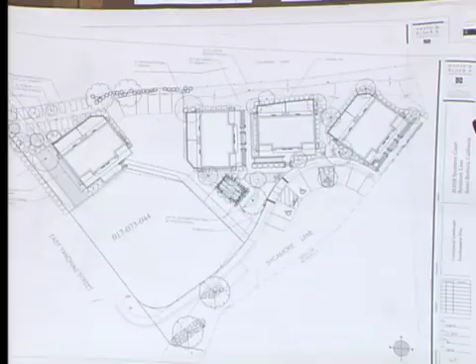Do you have any lighting cut sheets yet? No, not yet. We do have a color board.

There are 2 more comments I haven't mentioned yet. The board finds that proposed zoning modifications are aesthetically appropriate and do not pose consistency issues with the ABR design guidelines or the neighborhood preservation ordinance. The board also finds the proposed zoning modifications present no negative impacts to the neighborhood.

I noticed you pulled those pilasters back - did that change your distance between buildings issues at all, or is it still there? It's gotten better, but we still have multiple modifications. They've been interpreted slightly differently after our intake meeting, so we're pursuing 3 modifications: one for a front yard condition, since this building is actually a front yard because of the street here; the second covers several different between-buildings conditions; and on the far side of the site, there are conditions where you're just talking a few inches into the setback, just where the building was built - that's a side yard condition. So we have front yard, side yard, and in-between building modifications.

And then the final was to choose one style of architecture, either Monterey colonial or Spanish colonial revival. That's been the biggest challenge for us, since this is a renovation and we're dealing with existing building structures, and for the most part our additions are additive - we're not looking to rip them completely apart and disrupt. We're trying to minimize the period of disruption on occupancy, keep the tenants in there as long as possible, have the improvements take as little time as possible, and keep the budget within reason.

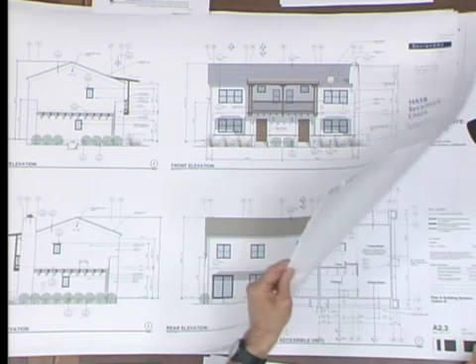Okay, questions from the board? Oh, we open it for public comment? And seeing none, we'll start with questions from the board.

Stephanie: Kevin, is there a reason why these louver doors for the water heater closets can't be moved to the inside face underneath the covered area, the overhang? Kevin: Oh, we were just keeping them in the existing locations. So in 9 of the 10 spots, they'd be exactly the same frame locations, and then in the handicap accessible unit, they'd be raised but still on the same face.

Okay, so it's because they're in the same locations and nothing about that area is changing, is that correct? Like some of these are added, some areas taken away. Those are the same boxes. There might be room to put them on the sides if we had to. It's a little tighter, I think, proportionally. It seemed about the same proportion in my opinion, but take a look at it.

Also, would you consider this small eyebrow detail in other areas, such as the second floor windows, or is that cost prohibitive? No, we didn't do it on the back side because the cornice is so close to the window head. I understand, here it is, but not on this side. Actually, you're right, on this side, this detail—I understand you don't have enough there, but we could add it to possibly the back side to give a little dimension to the windows on that second floor.

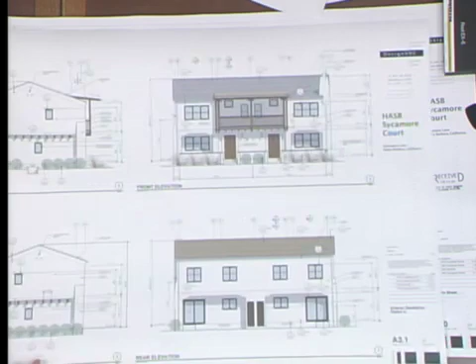Okay, other comments? Amy: I agree with Stephanie, and I think the change from plaster to wood details goes a lot nicer with the design, and also with the wood on the front doors and the recesses there.

The only material I was looking at was the color for the doors and windows, and thinking about it being more of a bronze anodized rather than black, a little bit warmer. Well, verbally I think you represented that it was going to be bronze. I did—that's a decision that goes back to like 5 years ago, we just kept that one the same. So is it black or bronze anodized? It should be bronze, that looks black. I asked her to put on bronze. So that was my only comment, we prefer the bronze anodized color. Yeah, I'll check on that. Other comments? That was all I had. Okay, thank you, Amy.

Courtney: I don't have any comments.

Howard: I agree with comments made, and I would especially like to see these louvered doors to the hot water heater enclosures moved around to the side. It would greatly simplify that elevation in all of the buildings. Other than that, I think the changes made to the fenestration and details to calm this project down and simplify it are well done. I think this project is ready. All right.

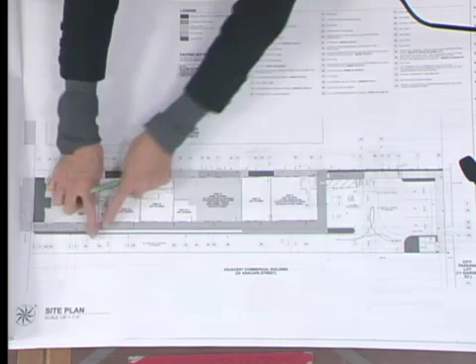The justification for us decreasing this planter by 1 foot from the previously approved 2 feet was because we're developing and adding a huge amount of green to the project that goes all the way down the driveway in the form of that new arbor that we're going to talk about next.

But since they're under construction with this deck, that 1-foot extension is part of the review after final. That's why it's clouded.

The ramp that was here and here has now been relocated along the north property line. Instead of that ramp being here and here, we just moved the parking over, and this planter strip got decreased just slightly in size to accommodate the ramp that now is going there on that north property line.

So this plan is going to show us the ramp over here, but this plan is showing it over here. Is that what you're telling me? No, I'm telling you that the previous approval that you guys saw had a deck that was approved that was 1 foot less than this ramp.

What I asked you though was I'm trying to get a distinction between the two things we're looking at totally different things, different scopes of work. We're only talking about the deck and the ramp now, for this set, the review after final. So those are the only things that we're asking to move forward with.

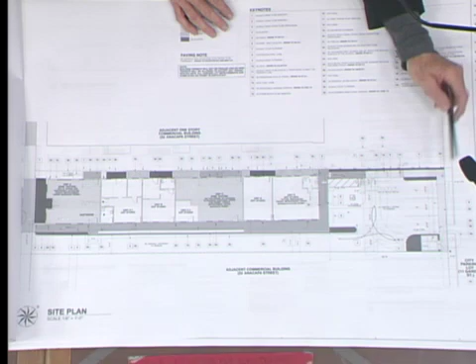That's why we separated them out, because that allows us to complete the parking lot. When we complete the parking lot, then we're allowed to open the gate. So until we complete the parking lot, we can't open the gate to the public parking lot. And since we have the construction crew already working on this, that's why we want to do that.

So let's look at that, and that makes sense to staff too. No comment. So that's all we're doing there. It doesn't really translate into drawings because, like I said, it's just 1 foot. Everything else is remaining the same as it was.

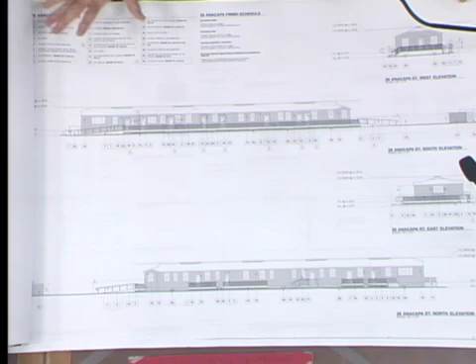The hog fencing was already approved and was already currently under construction. You could read over the minutes from the last meeting one by one, and we can address all those. But I just want to tell you now that the only thing that we're requesting to be separated are those couple of things. Then I'll get into the comments about the arbor.

Did we comment on what you're asking for approval on with this set? No, we didn't. There were no specific comments, so there's no point in reading them out. I just separated them out, and that's why I'm telling you. It doesn't change anything. It doesn't change the planting.

See this planter, there's still the same amount of bird of paradise still here. It just, the planter went from like that big to that big. That's that project. All right.

I think we need to vote on them one at a time, right? This is the review after final, right? Yeah. But just to make sure, if you want to, Kirk, you can read the minutes to make sure that I'm not missing something. But I don't think there were any specific comments to those 3 items on the minutes.

No, there isn't. About the railing, are you addressing the railings when you move the deck? The railings were always proposed as hog fencing, and they still are. Right, but there was a comment about the lack of uniformity in the railings. That was with the presentation we heard last time, which we're going to look at next. Okay, so that's not a part of this project.

This is the final review. Right, okay, that's fine.

I didn't quite understand that comment because we got the hog fence railing approved in the previous proposal, and the front railing on Anacapa was existing to remain. It's not a hog fence railing, it's an existing wood picket railing. We've already gotten approval for that, and we're not making any changes to the railings.

We saw wrought iron railings in the last drawing that Henry presented. It might have been artistic license on his sketch. Okay, so that's not part of this, and we're not making any changes to the railings that were previously approved.

Let me ask about one of the representations that was made - that we were going to have vines growing up on this big long trellis. Is that going to happen? Okay, so questions from the board on the landscaping being presented here? I have one. Yes, Stephanie?

Why does the driveway planter need to get smaller by a foot? It needs to get smaller to accommodate the increase in the deck by a foot. This deck, because it's also an ADA path of travel, will allow for a little shelf, enough for people to sit with a glass of wine since these are wine tasting areas, giving more room for a nice outdoor seating area.

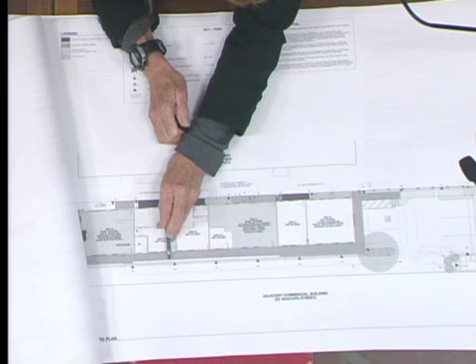So I thought you said the width on this driveway changed - let's go back to the original. No, actually it didn't. So the planter width used to be wider out here, but it didn't change - this line never moved. The deck line moved out so the planting is a little bit less in there. That's all.

Other questions? Scott? Just one - I want to reiterate, you guys are doing the arbor project, right? Yes.

One question, because I didn't see this before - what was the ramp configuration beforehand? Before there was a small area here, a landing, and then a larger area ramping up this way. So you ramped up this way, and now you're proposing just to put it along the driveway?

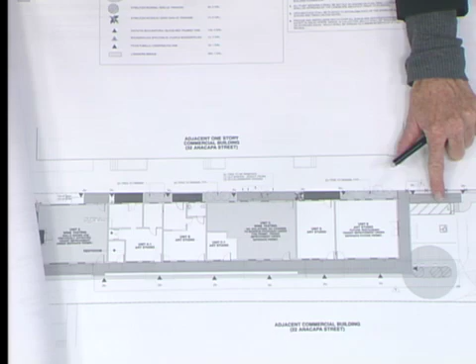Was there planting lost out here because of that? No, what was there before - this handicap parking spot was shoved over, and the loading zone overlapped with the path of travel. So this loading zone and everything shifted over, and that's why this moved. Okay, so you just shifted everything over.

Questions? That was Courtney - sorry if I'm beating a dead horse, but has the walkway configuration changed since we saw it last time, not with Henry, but with you? No, the only thing that changed is that because there's room for the ramp now, to get to the ramp you go from the loading zone - just that little jog or swoop that was added. Nothing else has changed.

And that material is concrete, that walkway? Is it a different color than the parking lot, or is it gray? I think it's just concrete right now, I can't remember exactly what we got approved - it might have been colored concrete previously approved. We're making no changes to the previous approval. Okay, then I won't ask any more about that.

The final width of this skinny planter between the deck and the driveway - you said it's a foot, but is that from face of curb to the edge of the deck, or a foot to the back of curb? It was 2 feet. A foot to what - the back of curb or the face of curb? Let me see if there's a detail, I'll show you.

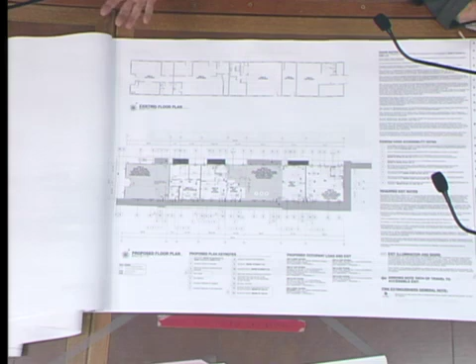If you look at the site plan, and there's the shop. I don't have the previous approval with me. All I know is we moved it out a foot. So if we moved it out a foot and we had 2 feet, we have 1.

I understand your question about the curb, but then the hog fencing doesn't come all the way down - there's a gap between that and the finished grade. No, the fencing comes all the way down, it comes down below the deck as well. Yeah, but there's a 2-inch gap between the bottom of the hog fence and finished grade, which would allow you to kind of shove the plants in underneath. Yeah, we did that on purpose.

The landscape architect wanted that. Who is your landscape architect? Kate Dole.

So just so I understand, the dimension between the building face and the edge of that seat is what, 4 feet? But what's your pinch point there on the deck? I don't see a dimension, and I don't have a scale. I don't see that dimension either. Do you have a scale? No.

No, architectural scale, please. And you can look at the previous approval too, if you want to pull those plans out. So I don't know if that's the right one or not. It's 8 to an inch.

So right now, the deck is 6 feet to the inside of the hog fence top cap, and before it was 5. But the dimension from the bench, the edge of the bench to the face of the wall is what? That was the question - the white space is there. 5 feet. It's 5 feet.

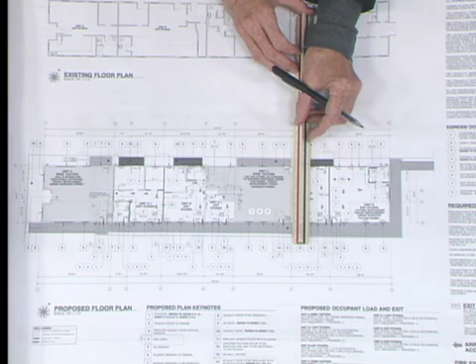Okay, it's not a bench, it's a shelf, and the shelf is 12 inches deep. The shelf is intended to be a seat, right? No, it's just - if you look at the detail, it's intended to be a shelf to put your drink on. Got it, okay.

And in order to get enough room to be able to pass by, we had to move the deck out a foot in order to make it more lively, so people could actually sit there.

I have one more question - so you're saying this distance right here is 5 feet? Finish up this way then. Howard, do you have any questions? No. Okay, Stephanie? Don, is that curb necessary?

So this is showing the planter - 10 feet to the face of curb, and 11 feet to the edge of deck. So you're actually going to have 6 inches of planting. Well, the curb is 4 inches. Okay, so you have 8 inches of planting. It's not intended to be a huge planter, that's why we're adding the arbor.

Right, but you would get even more available planting space if the curb was not there. And it's only cleaner in this one area. I can look at removal of that. It's just cleaner, you know.

I do think the curb will help prevent people from driving into it, it helps protect. Okay, that's what we thought too - from those wheels going right into the side of your fence or building. So I think it's fine, because it's a narrow driveway anyway. Okay, comments?

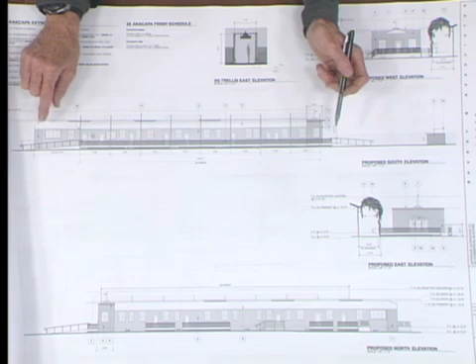So like I said before, when Howard was asking about the railings, it was a misunderstanding about any wrought iron. It was all the hog fencing, not changing, and the front was always a picket fence that is not changing.

The window and door details are all on here. And what was the other comment? Railing design, stormwater management, that was it. Railing design, that was coastal exemption requirements, and I think they got somehow put on here.

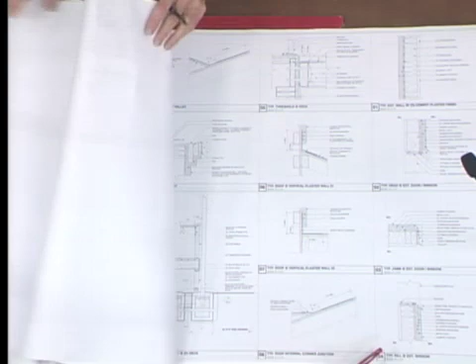Is this a new detail? This is the detail for the steel trellis, the arbor. It's not attached to the railing. It's a flagpole design that goes into the planter right next to the hog fence railing, separate.

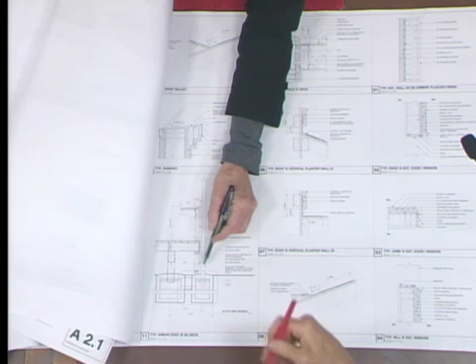And curb is not shown. The curb is something like that, right? Here, well, it's one foot from here, the outside edge of the curb, right? Here, but the flagpole is going right in between there, in that little planter area. And I think there should be notes about stormwater management.

Are there other details that show how that arbor radius works? We don't have them yet from the structural engineer because this is comments only. That's why we wanted to separate the projects as well, because we don't have any more additional structural details of the trellis. It's just that one detail.

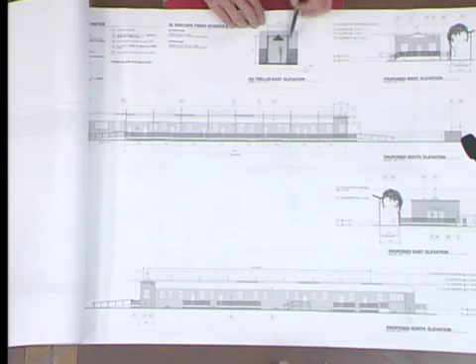This probably got explained by Henry when he was here, but these are existing antique wood ionic columns, and then there's going to be a sign that's under separate permit. We're doing a sign program. But this location of this unit will replace the approved trellis from the other project. Because it wasn't a change to the design, we kept it in this new permit, because it's actually a different trellis. Where does that occur? On the back.

Is that to the parking lot?

To the parking lot here, this replaces this one. What he should have done—I don't think we reviewed that. That's the first time we've seen that. Oh, it was on the other plans though. Maybe it didn't get reviewed. But it's going to be right here instead.

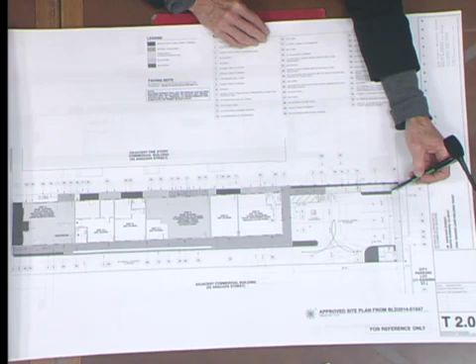The old trellis that got approved had 6 posts as you entered. But as you come down this ramp, you have to turn a corner and go down—this is the handicap access to 36 Anacapa. We brought the whole thing back, and I'm sorry it doesn't reflect here. The new trellis is going to be here, here, here, and here. It's going to be wood columns with an exposed, rustic steel beam across.

And the wrought iron cutout sign, under the sign permit, will be hanging from it. But we brought it back away from the bottom of the ramp so this area isn't crowded, because we had a meeting with the city and they requested that this area be a little more open. So we pulled that back.

So that's—okay, this looks like it's 4 feet 8. I see, okay, that landing is 5 feet. And the height doesn't pose an issue in that location? No, okay, all right.

All right, so questions, comments, public comment? Anyone from the hearers? No? So we're into questions from the board. Howard, are you ready with a question or two?

Yeah, just questioning about these fences here, railings. So I'm looking at the proposed north elevation, and I see the hog fence in several places. And then I see the horizontal rails here in the middle of the building. Which sheet, Howard? Why don't you come over here and point. A2.1, okay, the proposed north elevation. In the middle of the building there's a stair rail and deck rail that's different than the others—is that existing?

It's existing. There's a fence right next to it, and you can't see it from anywhere—there's the fence. If you look at the site plan, it must be the one we didn't have to demolish, but because we're putting a fence along the whole north property line, we didn't feel like anybody was going to see it anyway. Okay, other questions?

And this other railing over here with the crosshatched lath—is that the AC? So you're saying these fences are all up against the property line and another wall, essentially? A 6-foot-high wood fence is going to go along the north property line. That must be your wood existing fence or theirs? I think that's the AC unit, the existing enclosure. So is that your wood fence that you're proposing? Okay, so that's not on the plan, right?

It is on the plan, I don't know what number it is. Looks like 5, it's a new hog fence. Oh, maybe that's the railing. No, it's a new fence—it's a wood fence, and it was already approved on the previous approval. The way it's shown here, it's just a dog-eared fence. It was on the previous approval. So right now, because we separated them, I think what I need to do is go back and take out the ends of anything that already got approval. It's existing, it's already built.

In fact, this line—I want to comment on this fence and these trees. You just reminded me of something I didn't bring up. But in answer to your question, yeah, there's a previously approved fence that got permitted along the entire north property line. Other questions? I think what his point is about is uniforming the materials. Two questions—you're done? I'm done, okay.

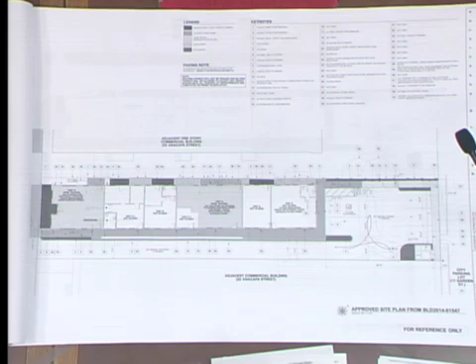I asked because I'm curious where that styling comes from. It didn't come from the existing building - the whole concept is a little funky to go with the funk zone, so they just wanted to use them because they were really cool. I asked him for photos of them, and he didn't give them to me yet. I'll see if I can find photos of them.

The other question I had was related to the height of the trellis across the driveway - is this a specific height requirement, I would assume, for fire or something? Well, when we get the structure from the engineer - but this is what looks good from an arch standpoint, instead of it being a shallow arch. It just wants to be an arch like this, more of a traditional arch, we felt. But it's not drawn based on any specific height requirement.

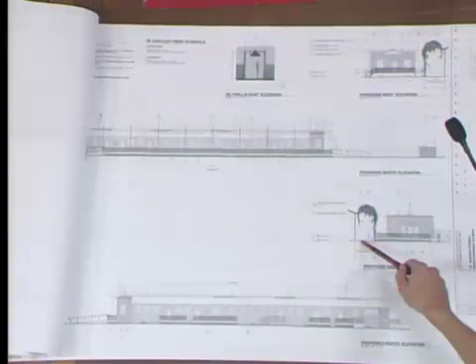It wasn't designed that way for clearance. We don't have to - we're definitely going to meet our required clearances through there, and we meet or exceed them. I don't know what it is as drawn. We don't have this lantern designed yet, so I can't tell you exactly how we determined how to draw it other than it looks good that way. If I had to speak for Henry, who's not here, I would say it looked good that way. And it's drawn now at 9.5 feet up.

Okay, that's all I have.

Just so I'm clear, right now this building is wood on the front, right? So for the previous project, did you get it permitted to do the plaster? No, that's part of this project. Because right now it's all this kind of funky wood, almost like a siding - almost like a hardy board. So under the previous permit, you hadn't already gotten the plaster included? No, that's part of this permit. Okay, that was my one question.

Scott, no questions? Okay, Stephanie?

Raymond sent pictures, and I'm not sure - is this for conceptual or is this for preliminary design approval? We cannot give project design approval, we can just make comments. That's all we can do today.

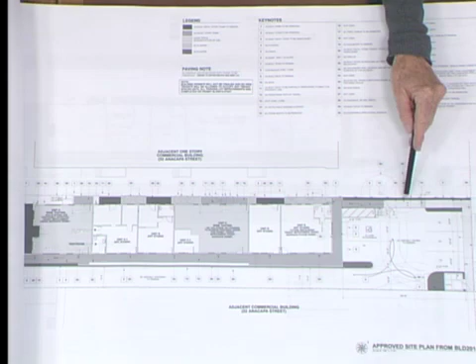The one comment I wanted to make is that these trees on our site plan showed up on the adjacent parcel, but we got a survey of the north property line, and the property line disrupts the trunk of the trees. We want to keep the trees, and the property line runs right through them. It's a little more on the adjacent 32 Anacapa project, but they aren't depicted that way here after the survey came in. Because of the maturity of the trees and what it does to the rear parking lot, we don't want to remove them. I'm saying this now because I think the next project you'll see is a proposal for this property, and I don't know what they're proposing, but I want you to know these trees have been surveyed and the property line does run through and disrupt the trunk of those trees.

Okay, thank you. So all in favor of the motion? Mr. Chair, can I just read through those real quick to make sure I have everything?

Okay, so ABR in general was in favor of the proposed architectural revisions, but needs to see more detail to make a full judgment. Some were concerned with plaster as a building material. You'd need a detail on how the facade meets the metal. Plans need a depiction of all features, such as fencing. Concerned with the height of the trellis and lantern regarding clearance and appearance. Study refining the details for trellis posts and footings, and you need a detail of the curb planter transition to the hog fence. Is that correct?

Yeah, and then continued 2 weeks to the full board. Is that correct? Yep. I would just add... Okay, sounds like we have a couple of other additional comments.

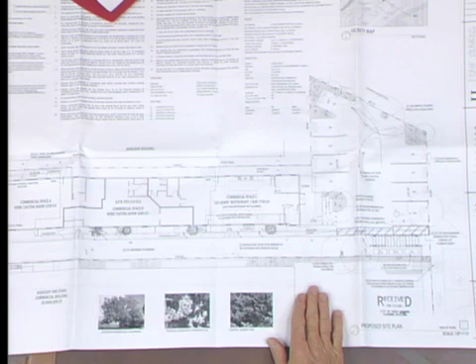Sorry to interrupt, could we break out the photos also? Oh sure, that's a good idea. So currently this is Corks and Crowns, Drake's Winery, and this one's vacant, which we're proposing to do a sit-down restaurant.

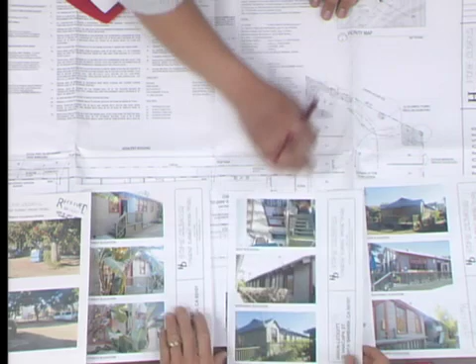So this is the front facade, and which we're not doing anything to. This is the north facade, where we're adding 2 decks. We're extending the deck to provide ADA access from Anacapa Street. And this is the far end from the rear. This is the view from the rear parking lot. Okay, side, and then this is the whole...

These are images of the building from the driveway. Just walking down here, you can see there's some banana trees, elderberries, all along here that are pretty mature. Those are pretty big.

And you're keeping those, but you're proposing a deck around them? Correct. And then finally, this is the driveway, or the parking lot, where we're proposing to restripe and clear coat.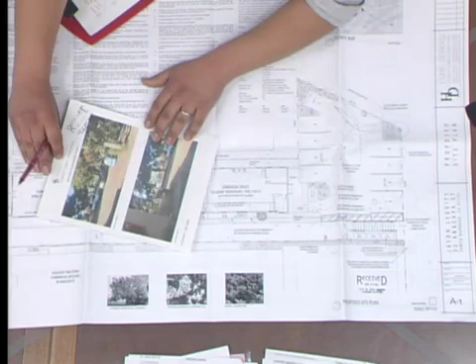And this tree is currently impeding traffic to be able to turn around, which is this one right here. Is that asphalt driveway? Yes. So we're proposing to remove it.

In order to make up for that, we're proposing a new jacaranda right in this new planter, where there will be bicycle parking as well. And some of the banana trees that were going to be in the way, we're proposing to put adjacent, next to that tree, in that same planter.

So then as you were starting off to address our comments from last time, do you want to go on with that? Sure, well there's another aspect to this project. As you saw in the previous presentation, there's an opening, a connection from the city parking lot into this 20 Anacapa property, and they're also proposing to extend the opening in that fence so that there's also access into our property as well.

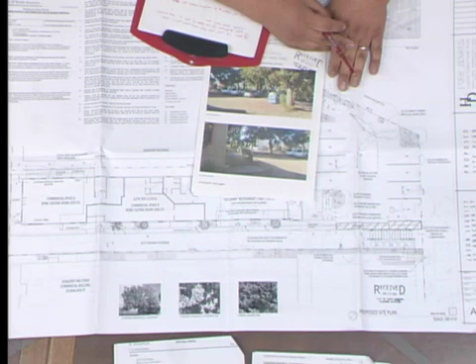And what we've done is we moved the trash enclosure to the back here and pulled it back so that people can get through. And we're proposing a new trellis structure that goes over this access way.

So it creates the same feel of an entrance through the rear, and we're also providing an accessible railing here. In my previous presentation, we had it up against the building. Now we're moving it over here. So that would be right where the trash is currently. We're just creating an enclosure around it.

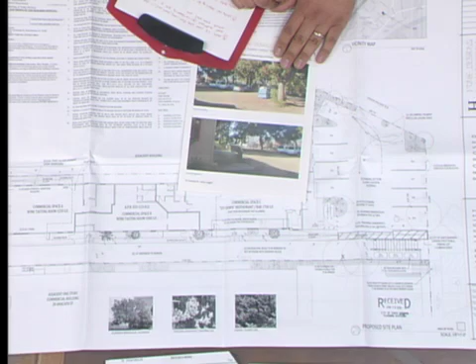So that was actually another one of the comments. It said to study the trellis structure on top of the trash enclosure. So instead of having just a trellis over the walls, I'm proposing this trellis structure in front of the trash enclosure, which you'll see. Provide an elevation of it.

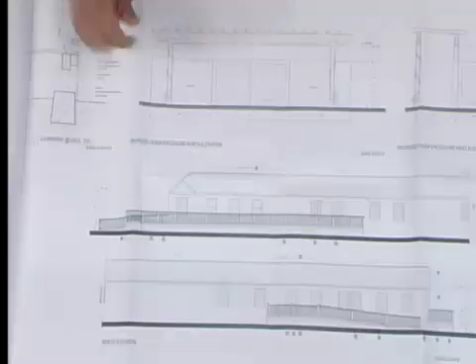Another one of the comments was to study the rail detailing for variation and to match the existing skirt detail. So we've looked at the railing detail and matched it so that the wood goes all the way down, the skirt goes all the way down. And we've provided variation on the driveway side. All this won't be seen since it's on the north side and there's a chain link fence that just divides the two properties. So the railing that will be visible to the public is the one adjacent to the driveway.

So this is the new railing that we're proposing, where we have corrugated metal panels flanking the entrances to each of the tenant spaces. And we have here, here, and here. Was that proposed last time? No, before it was just all wood rail all the way across.

The red flowering gum tree, I missed that, how you were addressing that issue. We're proposing a jacaranda to make up for it over here. Oh, okay.

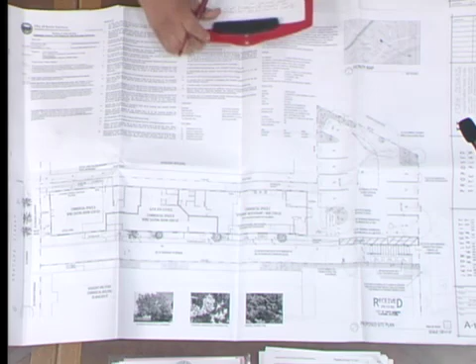So does that conclude your presentation? We had a landscape architect come out, and this is what he recommended, as well as installing drip system irrigation for all the new plantings so that they can take growth.

All right, so we're into public comment. Seeing no one from the public who wishes to comment on this project, we're into questions from the board.

Stephanie? Comment, questions? No questions. Scott?

Can you go over the detail or how you think you might construct that corrugated metal balcony rail edge? Sure. So I have drawn a detail for the railing where there's the wood pickets. For the corrugated metal, it'll just take the place of the center picket, and I would still keep the 1 inch by 1 inch stops, and put the corrugated metal in between. Got it. Okay.

Amy? I don't have any questions. Okay. Courtney?

I'm confused about the design of the trellis and its relationship to the trash enclosure. So it appears that you're adding a trellis essentially in front of the trash enclosure. Is that right? Correct. So what is the thinking there? Well, this is going to be one of the main entries, the one from the Garden City parking lot. So people will walk through here with trumpet vines growing, so it'll create kind of a nice covered arbor.

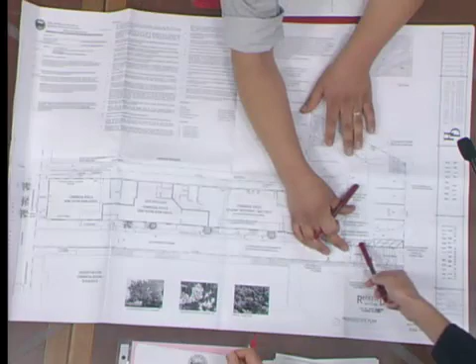Can we look at the site plan here? Of course. So the trellis is here, and you have your accessible route immediately adjacent. So why would somebody walk this way into oncoming traffic when they could walk just right next to it on the clearly delineated accessible route?

Well, this is not a very busy street. Not many cars come back here, it's only mostly employees, so this will be clear of traffic most of the time. So this would provide a nice entrance, I think, and they would choose to walk through here as opposed to the route mainly reserved for ADA.

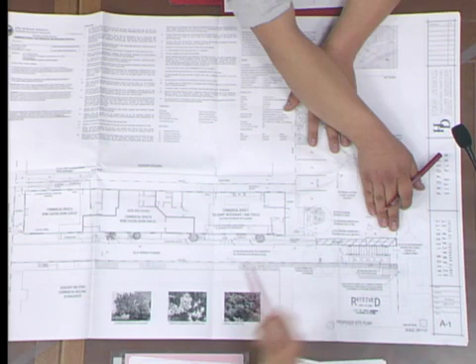Go ahead, Chris. Well, I was just going to say, couldn't the accessible route go under the trellis? Maybe you can make the trellis a little bigger? Well, we have to provide this for a landing, and the ADA basically branches off of that accessible route. I would like to widen this, but we can't have anything protruding or encroach into that loading zone, right? Not to be clear.

And then can you explain again how you addressed any possible way of keeping that tree? Did you study this? Went back and forth, several emails with transportation, it was Steve Foley, and he was just saying the trees have to go. But I managed to keep one of them, just diagramming how that turn will be able to work for this spot. But did you look at alternative configurations for the ramp? Yeah, we pulled this back, and it's still, this turn is what determines the amount of parking spaces, and we're down to the minimal 9 with the ADA spot.

What's happening with this man door? It looks pretty close to the tree. Yeah, that's just to bring, since the trash pickup isn't, they don't all come out the same day, they come on alternate routes. I had to provide a door so that this bin can be taken out on that specific pickup date.

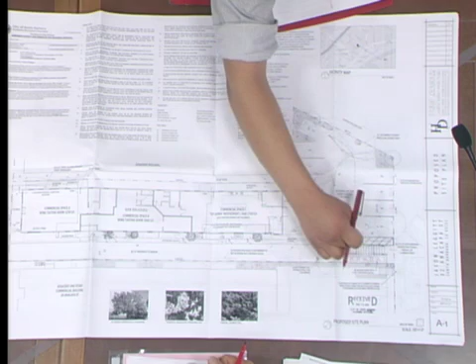You don't have a view looking from this side towards this? One question related to this. There are doors right here. Do you need this one also, or can you just use these? No, I would still need these to be able to get this one out. I think this one will be picked up on a day where these two aren't, so in order to get that guy out, it's got to slide that way.

This is 8-inch. There we have 9 feet on ours. So yeah, it's basically where that was.

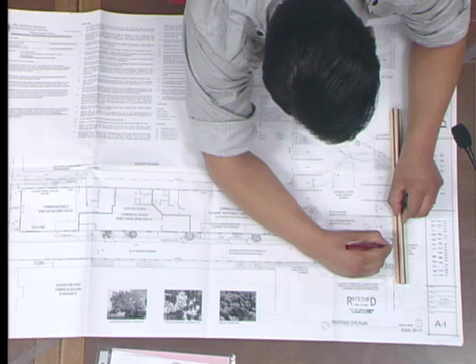I know we talked about this last time, but I don't see it on the plan, and I don't recall the size and species of these other large trees. Oh, these are to remain. Right, but do you know what they are? I believe this is also a eucalyptus. Or if you have a photo, we can look at them. There should be photos. I'm just trying to get a larger picture of all the existing skyline or large shade trees you've got back there, which is difficult to tell. I may have some on my phone.

You have other questions? They both be eucalyptus. That's all I have. Okay, Howard? This is comments, right? Questions. These are questions.

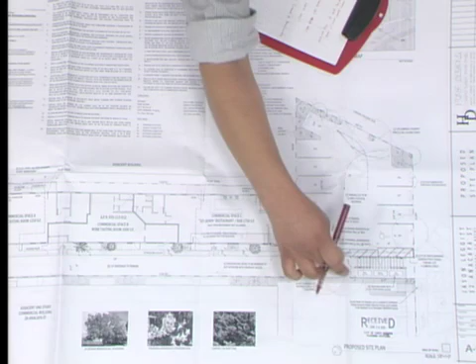These two trees, one of which you are calling to be removed, are those trunk diameters and exact locations by a survey that you can produce? Well, actually, they were not. They were just measured on site and drawn according to site measurements. However, from the previous presentation, which I just heard about, they are actually closer to the property line than are shown. That would make a difference as to whether it would have to come out or not. Sam, that's an important question. Okay, that's the only question I have.

Okay, and I just have one. The trellis design has a kind of Spanish detailing to the beam cut. Is there some precedent you were going off of, or reason you felt like that went with the building? I thought, at first we were looking at the next door trellis, the one at 28 Anacapa, and while theirs are more minimal, I wanted to provide some differentiation, give the person coming in an option. Some sort of identity, you mean? Right. Is that what you mean? Right.

All right, so comments from the board. Stephanie. Well, it seems like we need more information regarding the trees along the property line and whether or not they're on the property line. It seems like it would make a difference. Yes, the ramp location, I think, could still be pushed towards the southwest, towards the Anacapa Street side of the building, because it's pinched down quite a bit in that parking lot. Whether the trees are in that exact location or not, I think it gives a little more breathing room for drivers and people walking through that area. I think the trellis and the trash enclosure structure needs a little study. It does seem rather heavy-handed, the trellis structure itself, and not in keeping with the style of the existing building.

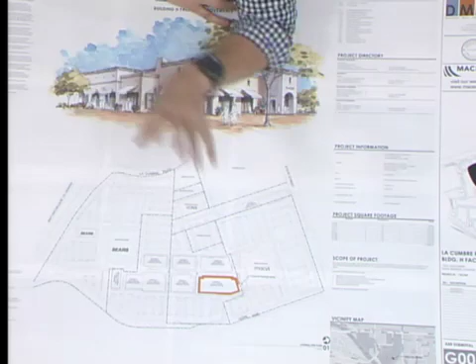The facades, the tricky part about these projects, as we've seen, is the tenant storefronts we really don't get to touch. So the challenge is how to create the new building facades while working with the existing storefronts. We'll do a quick tour around, but really the focus is this J. Jill corner that we went back and studied, as well as inboard.

There was one more, the Toys R Us. And we have photos if we want to go back to look at those facades a little closer.

We had pretty specific comments. Last time you were here, December 8th, I'll just read them out. Number one, the board appreciates the improvements at the mall and the work on building D and H. Number two, study opportunities to create more interest at the corner entrance near the J. Jill retail store. Why don't we look at that, and then we'll go on to the other ones.

So here's the existing condition. We have one of those porticos and an inboard entry to J. Jill. What we're doing is expanding the square footage. Last visit, I think the comment was it was a somewhat repetitive or plain corner, no break in height or accentuation at the corner.

So what we've done, per structural and square footage, we can't add any more square footage to our project, so we've maxed out what's allowable on the site. So we've furred out this corner about 18 inches to let this read and break this facade, as well as raised the height at the corner.

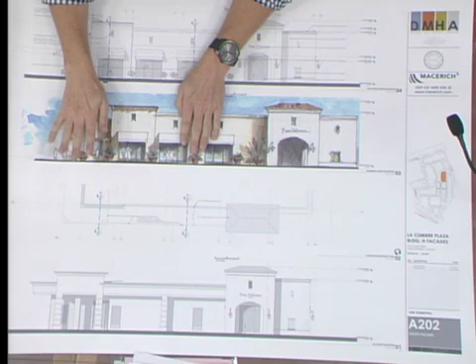So we furred this out, brought one of the main entries outward, and pushed this component maybe 30 feet back, so this corner reads a little taller. We'll dress this cornice detail up, working on a double clay tile detail, pushed outboard to get shadows and try to get as authentic as we can here.

Then let the lower levels be the same profile but not necessarily capped with clay tile. We're introducing two new storefronts to that side to really liven it up. That's one of the goals we have throughout these projects, is to open up the side paseos. Let me show you what that looks like.

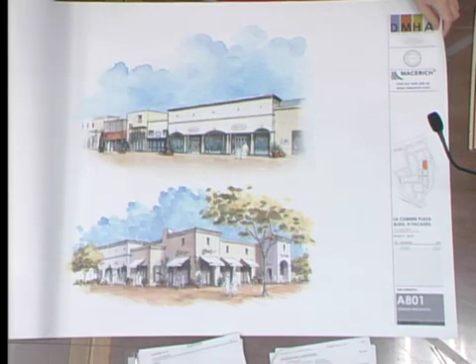I think it's best explained here, it really helps describe. So here's the parking lot, this is the existing tower element, here's the east-west facade. So we're introducing all these new storefronts.

And this corner element pushes out that direction, turns the corner at the same height, and we transition back down to an existing parapet height with a chimney element. We're working on these details, but thought it was a nice way to transition the two heights.

We pushed up about 18 inches from the existing height we had last go around. We want to give that presence, but we don't like getting too high out there because we're limited on how far back we can return those corners. We want that to look authentic, but around 8 feet or so we really reach our structural limits. So 18 inches we thought was a good place where we tested, and we couldn't really see them terminate.

And otherwise just freshen up the rest of the facades, new storefronts, and new awnings. So that's how we addressed this corner.

Would these be white, the way they're shown here? That's what we're proposing currently. So this will be like a tan buff color with a white linen awning.

What's the return on this side that we can't see? 18 inches - oh, between faces, 18 inches. But above the roof? The parapet above, we can get to about 8 feet. 8 feet is fine, 8 feet return, back over the roof.

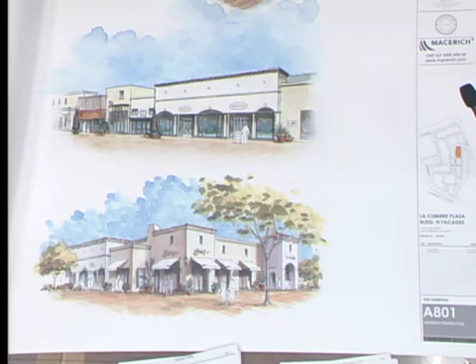Let's see. Number 3, provide more shadow relief along the pedestrian walkway. Well, that's something I've actually been thinking about a lot.

I think that was Tip's comment about undulation down the Paseo. Yeah, let me go to the site. So we studied that, spent time out there, as well as other locations, and we're pretty satisfied with how much things push in and out. In fact, we almost find this oblique view gets pretty busy.

So we were talking about removing the canopies. We all agreed that once the canopies are removed, it's creating a real downtown street facade patchwork. So as far as shadows, we spent time out there.

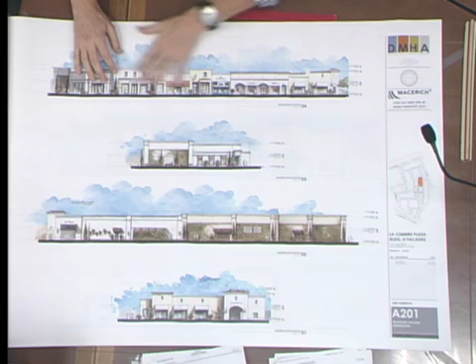We have one view that shows this, and maybe one more. Here's just a couple as you look through—there's lots of ins and outs and heights. So we were really comfortable comparing this to other downtown locations or neighborhoods.

Typically on a commercial frontage, it's pretty flat to the sidewalk, so we didn't really change anything there. Besides these depths, there are different depths of entries throughout and different types of canopies.

Is this part of your new proposal right here? These elements are being pushed out and added. In this current proposal—well, these are existing. Okay, so those are existing, and we're capping them, removing the canopy.

Currently it goes right to the top of that line. So when this gets removed, we're putting back essentially this second-story face with new windows, and then capping it back with a little shed roof on top.

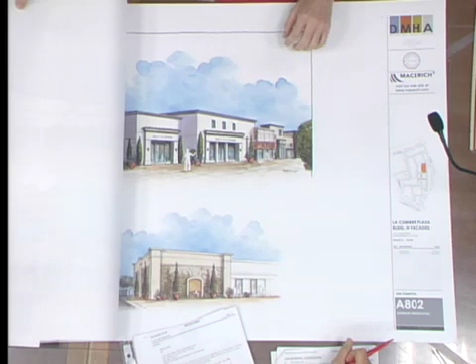How many tiles do you think you can get there? A couple tiles? Yeah, yeah.

Okay, so another comment, number 4, was to restudy the roof details of Toys R Us. Yeah, so...

This is the most challenging one. We had to go back and work with ownership and the tenants. Here's the existing condition, here's our canopy, and I know the board—all of us—felt a little uncomfortable with how thin it is. It's meant to be Spanish, but all the corners and stucco elements are very, very thin.

So the short answer is we're not allowed to touch anything below this line. So here's something we came up with.

It's inboard, a little more of a contemporary take. We don't need to be Spanish on just the strictly interior storefront.

So what we're proposing now is to redo the parapet above, keep that existing opening, and then band it with a perforated metal panel, like Cor-Ten metal, held just off. So it's essentially a screen, out about 2 inches, that can band that transom, allowing light to still pass through from the inside. So the interior experience doesn't change, but it really disguises that element.

Maybe just an inch or so off, just furred out, as a way to disguise that. So we can't thicken up these elements, but we can perhaps change the style of the storefront. That's sort of the approach we took.

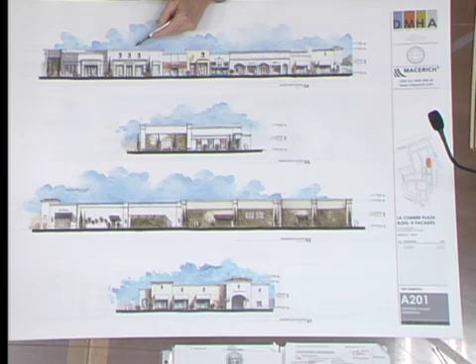There's been a couple in the back parking lots, and the details. You need enough depth to put a real window in a real wall and have a few inches and paint it out. Here, these are intended to be smaller, more like a decorative vent.

So this is a slanted sill. Let me go to the larger elevation, that might be helpful. Slanted sill with a wood grill frame and a louvered wood. In this case, we proposed wood.

So here's the scale, slanted sill, deep opening with a wood framed grill. Louvered grill is what I'm proposing there.

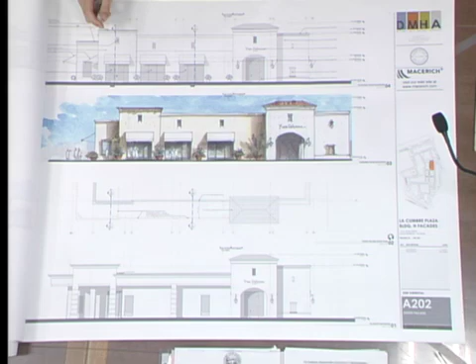The other question is wrapping the Toys R Us plaster in brake metal, totally off limits in between the windows? Where you've got plaster again - these details here are about wrapping that in some sort of brake metal to consolidate it, making it the same color as the windows. A possibility to unify that and make it feel more like a storefront rather than little strips of plaster.

I don't know the answer to that. A couple times we've had to go back and work with ownership and tenants, and it's a very sensitive topic, messing with that 14-foot line and below. I can bring that question up, but my sense is no - we've been told to steer clear.

Well, you're kind of doing it already - you're putting a big thing below the 14-foot. Right, but this compromise took the last two months for ownership and tenants to get this far. I could definitely ask that question because I like that idea, but this is as far as we could push it this go around.

My questions - I'd like to take a straw vote from the board. How many board members are comfortable with the contemporary approach to the Toys R Us, not necessarily all the detailing, but the fact that it's contemporary as opposed to Hispanic? Okay, so how many? I'm okay with it, not sure it's quite working yet. Out of 5, I'm okay with the notion of a contemporary piece.

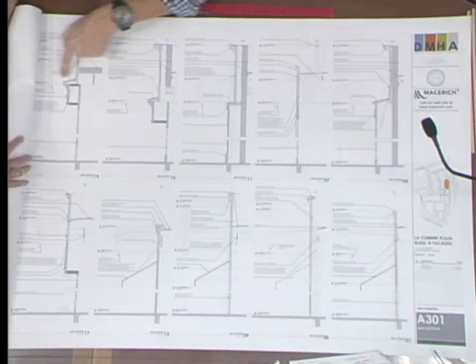See, here we are - actually, we have room probably for a few tiles. I think this was what Tip was asking for, more like if there could be corbels here, or an overhang with rafter tails or something to get more depth and more shadow on this. I think that was the nature of that comment last time - just to get a little more tile shown there, but it remains to be seen how many tiles you're actually going to get there. Any kind of irregularity of the tile along that facade to get some more interesting shadow lines and depth would be encouraged.

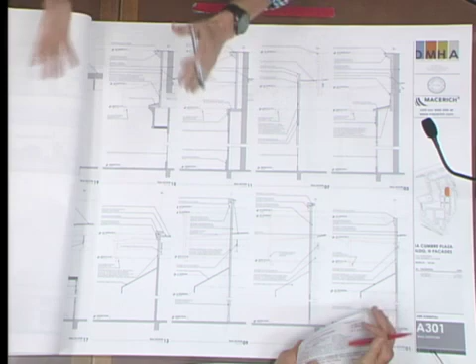Okay, I also have a question about the perforation on the metal - is it irregularly perforated or regularly perforated? I don't have an answer, we wanted to put this idea before the board because this was the only solution we could find with all the involved parties. What I'd want is a fairly tight perforation, so from the exterior as it's lit...

Regular or irregularly perforated, probably random or regular? I'm just thinking now, probably regular - I don't think it would be some organic design, I think it would be fairly regular. But the idea is that it's not necessarily transparent from the outside, only from the inside.

Okay, can we look at the J.Jill elevation from the mall, not the inside? From the interior.

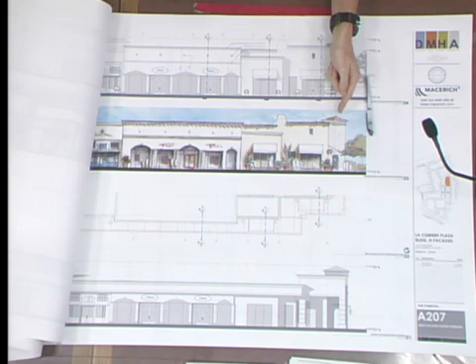This is what I had a question about, whether you're adding any of that tile to that lower section, that same tile detail. Currently we're just proposing this piece in the upper corner, and as it dropped down, the two lower elements as you see it from the corner did not, just to create a little bit of hierarchy between the two. And the location of that chimney, what does it relate to? Is this the same proportion on the other side, or what dictated that location for the chimney?

Just to comment, your CAD drawing looks like it's got tile on this roof, even though the sketch doesn't. Exactly, you're right. I could go to the corner. I think it was creating a uniform length around the corner, but we can double check that.

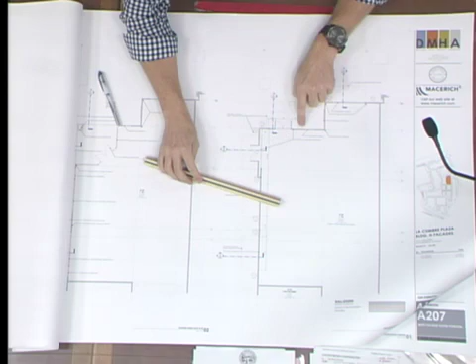Actually, does it show? No, I got it trimmed there. What page? I'm not sure. Can I do that on the roof plan? I don't have a roof plan, but maybe it's there. It's approximately the same amount of distance, and I just sort of line up that chimney, the transition where that lower piece is already lower, and that's the facade, where all those parts come together. It just felt like a natural place to bring that transition up.

Other questions, Stephanie? That's it for my questions. Would you like to start with comments? Sure. I think it's ready for preliminary design approval. I like all the proposed changes. I have a few comments about some of the details.

I think that the Jogel punched openings, the high windows that you mentioned were louvered wood, should be studied to consider a metal, some sort of interesting metal, perforated metal grill.

Study tiling the lower mall portion of the Jogel facade parapet. I'll be interested in seeing the cornice tile detail.

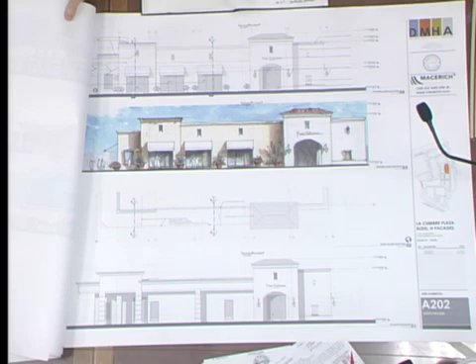I'll just add a couple of additional thoughts. Okay, this is existing to remain. Is this a wood grill or is that a metal grill? What is that currently? That is a decorative wood grill, painted. And is it recessed? Yeah, it is.

Let's see if I may not have a photo anymore. Yeah, it's recessed. Okay.

I think it was Stephanie that made the comment about the perforated metal corten, that it needed to be a random pattern as opposed to uniform. Yes. I think it could really be successful if it was much more playful than just a straight panel with regular perforations. I think if it was kind of like an art piece, maybe angled a little bit, that announces it as being even more offbeat from the rest of the very linear and uniform storefronts. I think it might be successful, but it would have to be really carefully done, and the way it's supported is going to make a difference too. So I agree with Scott about that.

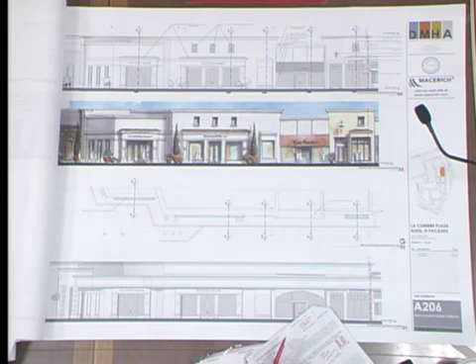This almost seems like an afterthought. It's not really working with the rest of it, and I don't envy you the difficulty you have with that, but I think it still needs some work. I think Stephanie's comment about getting a larger reveal here, so that this is not just a little pinched detail, is very important as well. And something about the proportion of this in relation to this, something feels really confined.

Like maybe this wants to be taller than what you've done here, and maybe not uniform in relation to these bands, so maybe these pop up a little bit more. Looks like there should be more playfulness and interest by maybe making that band a bit taller.

Someone like to make a motion? Mr. Chair, before you do, we've got 9 items on the full board agenda in 2 weeks, so I'm not quite sure with the timing of it all if you will make it in 2 weeks. I just wanted to warn you.

Well, I would say that we've looked at this a couple of times now, and it'd be nice when you came back if you were ready for a final. So it might take some time to get all those details worked out and get your clients to approve. So maybe would you like to give it PDA today? Well, I think we need to make the motion, but that seems to me the direction we're headed.

Well, never mind. I'll let somebody make a motion, or I will make a motion. Please, go ahead. Okay, I think this is ready for preliminary design approval.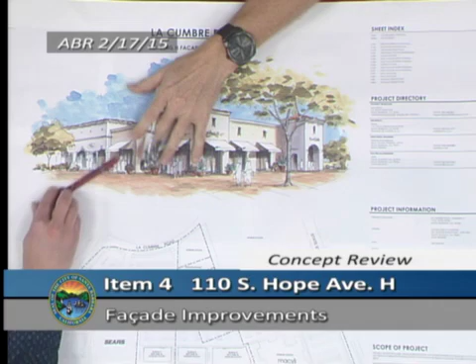Right, okay. Well, and again, it kind of goes to disruption of what they're looking for and their interior scope. Yeah, if you do a shed there, you're going to crash at an awkward spot. Well, we'd have to come low. We looked at shed opportunities because I think that's a good idea, but I couldn't do that there.

Okay, so I'll withdraw my revision to Stephanie's comments.

I would like to add one comment about the perforated metal screen at the Toys R Us. It's been said to make something irregular and kind of artistic, and I'm thinking if you go down that route, you'll be doing something like Gehry's Disney Hall, warped metal and all that, and I don't think that's going to add to the elevation. I think just studying the pattern of the perforations is the way, having a strong form to cover the facade of the building. I agree the layer cake isn't good, but study the form, something that causes stillness in that area as opposed to a lot of visual noise.

One board member, that's all. I think you're on point there, Howard. Yeah, no, I agree. I agree. Okay, so I don't know how you're going to incorporate that into the comments, but I think you got the point.

I want to mention that first because it's a change from the previous presentation. We have continued to have the permeable paving design, although it changes a little bit. And they have decided to create an infiltration trench in this area. The lot is flat, basically, so a big infiltration trench there, and then a big bioswale area at the front as well.

So going forward, the landscape designer could not be here today, but she wanted me to be clear that I talk about this first. Her intention was threefold here. First, to provide for drought-tolerant planting, and that planting is also on the list from the city.

Second, she wanted a lot of color that went with the Mediterranean Spanish look of the house. And third, of course, the permeability of the soil will allow for retention of most of the water that we had here. So she believes this should be a model for Santa Barbara landscape design.

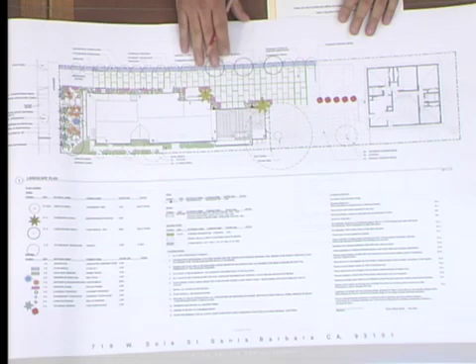So that said, I did what she wanted me to do. We paid a lot of attention to that. And then we went first to address the carport in the back. The owner agreed to create not just the carport, but to design a new detached garage that looks more like the main building itself.

Can we go through these items one by one to make sure we cover them? Sure, I just wanted to go through the most important ones. All right, go ahead, check them. Go right ahead.

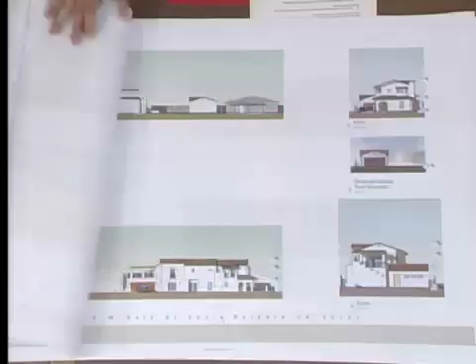On page A3, you will see the elevation of the little carport. That's the main elevation. On the other views, you will see the side elevations. Although it's a very simple structure, we believe it ties better with the character of the house. You can see the detailing as a stucco building with little vent tile, and a scallop detail on the rake that we're going to follow in the main house as well. So something simple, but with a door that looks like a double door. Are these little columns? Oh, those are actually downspouts, matching the leader downspouts we'll be using in the house.

One of the main points was to study the front northwest facade to improve the detailing and scale. If you see this view on the east corner, that's the north side corner. Before we had a straight open porch, kind of a veranda element. Now we created this little arch condition, which you can also see in the north elevation as one of the main features—it's a bigger arch.

And of course you can see the scalloping details at the top. We created a little covered balcony which we hope to have very well detailed in the corbels and the posts as well. We also modified the front roof line to create an overhip on the side area, so that we can wrap around and make it feel more human scale.

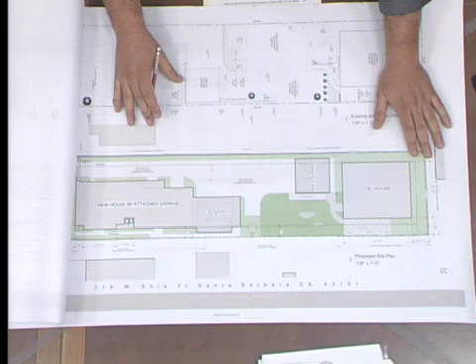And regarding the tree that we have there, what we did was reduce the stair width to give more space for that tree. We believe we want to keep the tree, the owner wants to keep it, and we believe with the additional space the roots are going to work fine. We don't have an arborist report, but we would like not to have one if possible. The owner's representative is an experienced landscape installer, and he believes the tree will work fine there.

Okay, one of the other comments we had was about footprints of adjacent buildings. Absolutely, looks like you've got them. I see them here, we got them there, but we also got a bigger page on G2 that shows them.

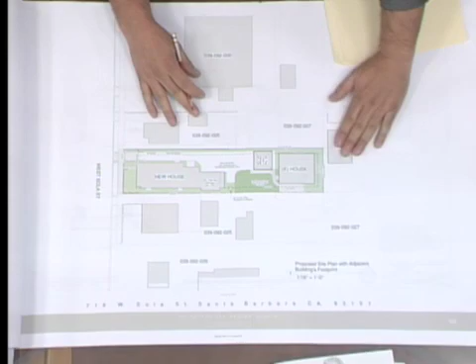Of course, this is a big one right on the corner. Then we have two residences here with garage, a residence in the back, another residence adjacent to it with garage and shed, and two more over there. And then we also asked for photographs of other two-story buildings.

We didn't get more photographs, but we believe that the ones we have before kind of show the two-story buildings around. This building is a two-story, very tall, and then across the street we have also two-story buildings, and I could point them to you. So these are all two-story buildings around the neighborhood.

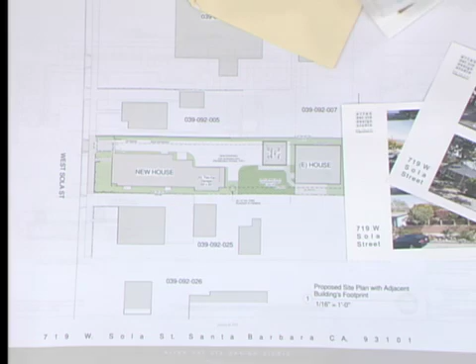Okay, is this nearby? That's ways back here, but let me just show you here. This is the property right here, and this is the two-story building next door, right there. Okay, then if you move here, this is also a two-story, very bulky.

You have a picture of that? Sure. You can see that house there as well.

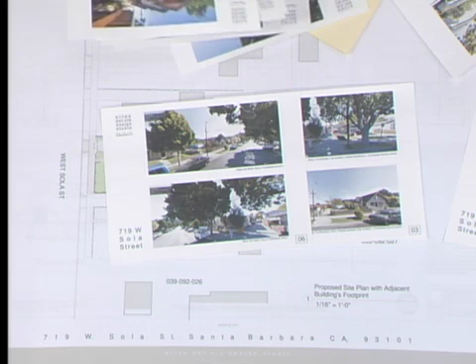I don't even know how, because I do have it. Is that it, maybe? That's the laundromat. No, that's on the back here. The laundromat is a huge structure. It's a laundromat? Yes. Everybody knows the laundromat.

You can see it here. It's a very big structure. Yeah, we're right here, and that's a huge structure up there. All of these in front are 2-story buildings.

Does that wrap it up? I'm open to comments and questions. All right, so I'll start with public comment, and there's no one here to comment, so we'll go to questions from the board.

Stephanie, go ahead please. Armando, on the south elevation there is a little bump out at the garage, and I was wondering what dictated the height of that.

Well, it's more a construction issue and also a scale issue, because what we like to do construction-wise is build the top of the garage, and then on top of that, at the edge, build the roof. Both are your deck joists. The roof starts at the top of your deck joist. Exactly, so that makes it a little bit higher there.

Okay, the other option would be to lower that, to create the roof starting at the plate, which would be about 12 inches lower. Okay, and...

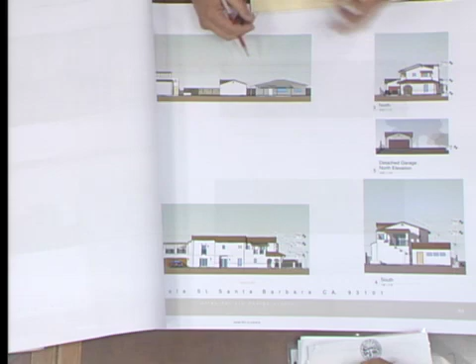I agree with you. But just looking at the south elevation, right above the garage elevation, you can see how it ties together. When you go through this neighborhood, you can see down to the garages, and most of the time the building in the back doesn't really have anything to do with the building in front as an architectural piece or group. So that's the idea. It's not set in stone, of course, but that's the idea.

Other questions? Are you just proposing as far as... Well, it's not really a comment. We can get to colors later on. It's down the road.

Okay, no further questions. Scott? No questions. Questions? Okay, Howard? Oh, I'm sorry, Courtney's here. Courtney's back.

I have to say that overall, I think your revisions and your changes have brought this project around 100% for me. Thank you. You have some very nice things going on. I do have some questions.

They relate to comments about little spaces like this here, which I don't know what they do. Can you point it to the plan? Yes, we're on sheet A2, this is the first floor plan.

Now, that particular element with the 3 columns separated in that space, we thought it was important to do it that way so that articulation became a valid object, which we will detail with the wood corbels and wrought iron. But your point is valid. It's just another solution we could have.

Thank you. Okay, Amy. I agree with the comments from Howard and Courtney.

Okay, Scott? Once Howard said that, I really dug into that too, and I'm finding myself in agreement that something just as smooth and calm down this part of the elevation would be helpful. Maybe it's losing that little window, maybe the railing's all solid. Something that simplifies it a bit might be helpful.

Stephanie. I don't quite agree with Howard on that. I think since it's on the north side of the building, it may not need that roof structure, but the trellis structure only, because it might become too shady over there, since it's going to be facing north.

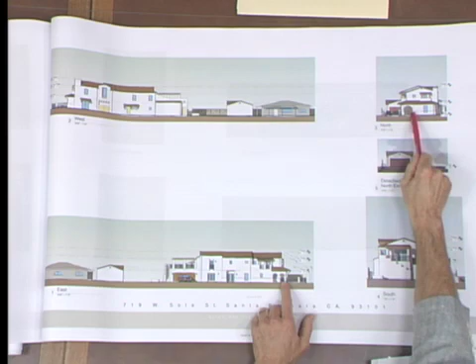The first thing that came to my mind was that to have an arch of this size on one side of the elevation and then turn the corner and have these two small ones speaks to discontinuity at that corner. It seems to me that this arch should match - there should just be one here and one here, with a column in the corner.

But you've gotten lots of comments about that. Everybody seems to be focused on it. So I think there's some redesign necessary, but you're on the right track, and the changes, as everyone's mentioned, are really nice since the last time.

So someone like to make a motion? I'll make a motion. Yes, Scott. Starting off, I think the board appreciates all the design changes, and you've done a very good job of listening to everything we said from the previous meeting. So excellent job there.

I think there's several on the board that feel that the east elevation toward the front may need some fine-tuning, possibly simplifying, and perhaps making the two arches at the two sides of the building match in proportion. There was a comment about the south elevation by the deck. I know structurally it's more difficult to lower that shed, but I agree with Stephanie that the proportions would be better. Somebody could consider. I don't know if it's a deal breaker not to do it.

Well, we thought about it. Yeah. I don't know, maybe we need a little straw poll on the rear garage, if it's satisfactory as designed, or if people feel with Stephanie that it ought to be simplified. We can add that later on, I suppose.